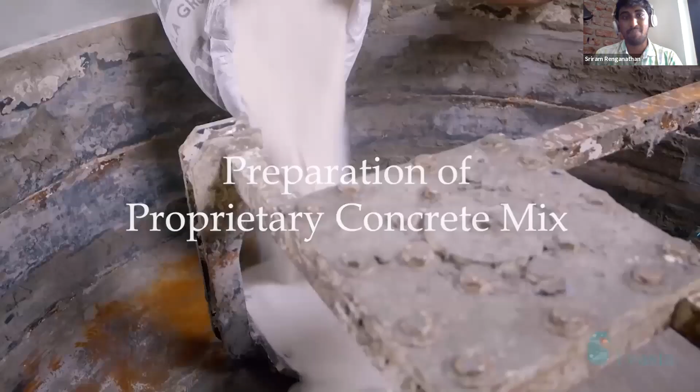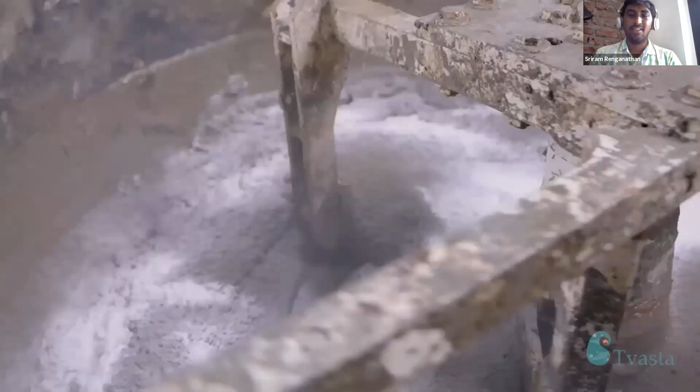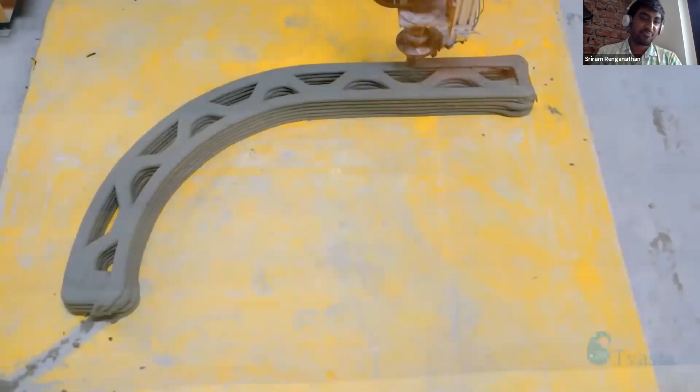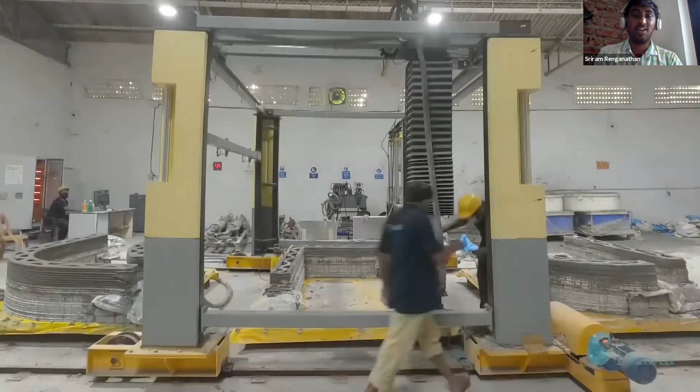I'll start my presentation with the making of the 3D printed house that has been in the headlines in the country for the past few months. This is the first 3D printed house that was made and installed inside IIT Madras. One big fact about the house was that it was made amidst the pandemic and the storm in Chennai - thanks to that, because without it, it wouldn't have been much of a topic of interest. Going back to it, what you're going to see is the making of each stage of the 3D printed house. This is the technology that we have developed. One interesting fact is that the entire technology stack is a made in India initiative - we made the entire hardware, software, and the materials. We researched and developed the materials, and then we also 3D printed the house. We are proud to say that we are a made in India startup who have completely revolutionized the construction field using 3D printing. What you're seeing is a 3D printer inside the factory. If you are in Chennai, please feel free to visit our factory. Per day it prints around 2 tons of concrete. I just wanted to start the presentation with this video.

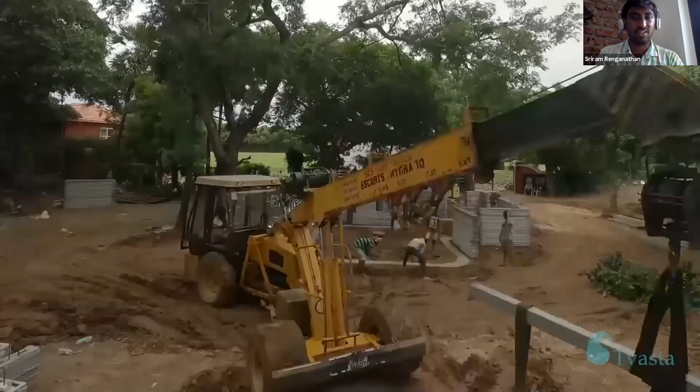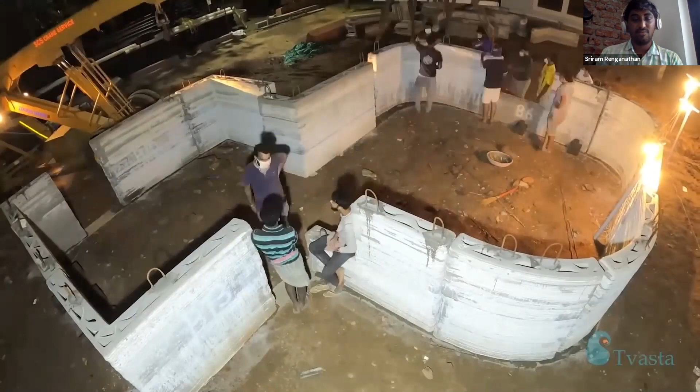The next stage you're seeing is the assembly of the prefabricated modules. The step is: we 3D print the modules in the factory, we take the modules to the site, then we assemble it, finish it, and deliver it to the customer. What you're seeing is India's first 3D printed house. In a few places, the 3D printed finish was left intentionally, because that is the raw and rustic finish that some people like. But I think going by majority, most of us like a very smooth finish in a house.

So that is why we made it as a combination of both. One good fact is that this was completed in a month—it took around 2 weeks for us to 3D print it and 2 weeks to assemble it. So we are coming up with more advancements to 3D print the entire house in less than 2 weeks.

What you're saying is beautiful architectural elements that 3D printing can make use of. This has been installed specifically outside the IIT Madras gate. If you ever come to Chennai, please feel free to visit it.

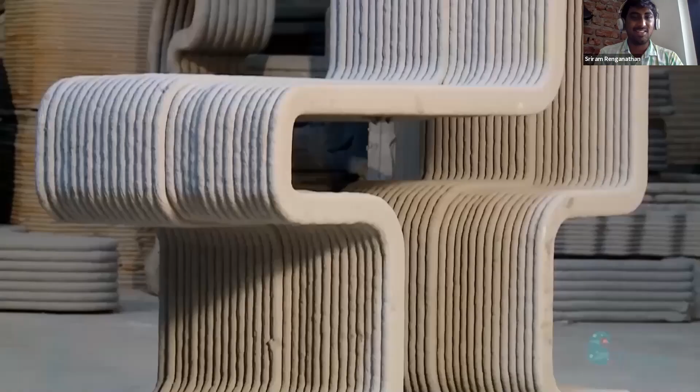And these are some customizable chairs that we have done, like pretty much some brand logos, customizable chairs using 3D printing. So the idea is that we make use of the customization of 3D printing, and then we deliver the best product to the customer.

And I also want to take a moment to mention that we have been mentioned by our Honorable Prime Minister in Mann Ki Baat, in the last edition.

Sriram, I'm afraid the audio is not coming. Oh, is it? No. Okay.

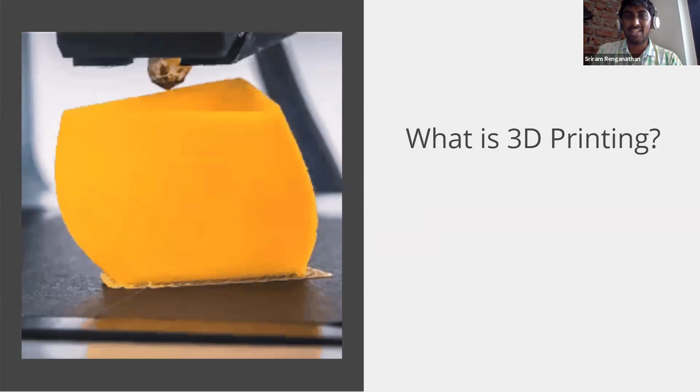At this point of time, there are 15 to 16 technologies in 3D printing, and it can be applied across different materials—plastics being one of them. Ceramics, composites, concrete, biomaterials, anything can be 3D printed, and that is a very interesting thing. It keeps inspiring us to explore different avenues of 3D printing. Any material can be 3D printed, and that is where our search is towards.

So sticking relevant to the topic, there are 4 critical aspects in concrete 3D printing. The first is the machine. Broadly, there are 2 types of machines: one is a gantry, and second is a robotic arm. Gantry has 3 axes X, Y, Z, and robotic arm has 6 or 7 axes.

At Tvasta, initially we started building gantry systems. We started out with a technology called offsite 3D printing, which means the machine will be placed in the factory, and as shown in the video, the models will be printed there.

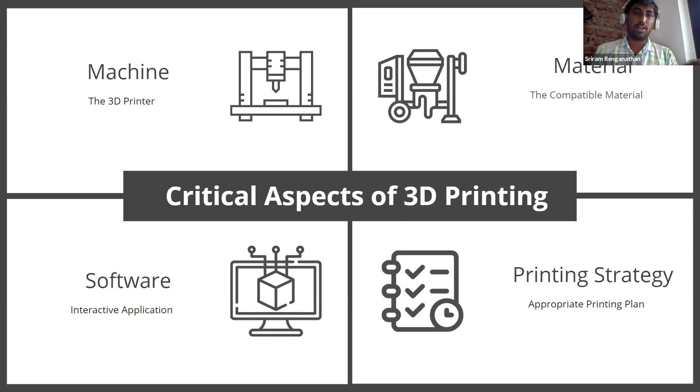Transported to the site, and then assembled. We are also working on a concept called on-site 3D printing, wherein the machine itself, in a modular way, can be transported to the site and the entire printing process can be carried out. Apart from that, we are also working on robotic arm printing, which gives different options of customizable designs or overhangs. So that is about the machine.

And material, as I told you, the concrete, we have engineered it in such a way that it is 3D printable. One big challenge is that it has to bear its own self weight. 3D printing is nothing but a layer by layer deposition of the entire design, so when each layer deposits, the concrete has to bear its own weight. That is the challenge. We have developed the material in such a way that it bears its own weight.

And software, as I told, to control the end properties and also give a user-friendly interface when interacting with the machine. The software we have currently developed estimates or optimizes the design. For instance, it tells you for a particular design how much material is needed, what is the printing strategy, what is the layer height, what is the size. It gives you every other information.

One interesting thing is that we are also trying to integrate direct BIM models into our software, so that construction files can be directly uploaded to our software and it can start printing. The last thing is the printing strategy, which we have already mastered over a period of 4 years.

Some applications demand a higher strength, and some applications simply do not require that strength. So at Tvasta, we look at the end application and then design the printing strategy. It can be done with steel reinforcements, or it can be done without. We customize the mix design accordingly, and then customize the printing strategies according to each and every application.

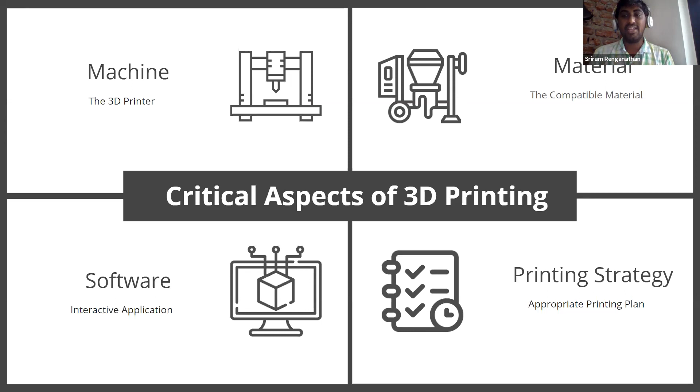The idea behind why we started working on such a path-breaking technology is to automate the construction process. As you all know, India being a growing country, we face a lot of challenges with respect to labor, or to be very precise, skilled labor. A lot of projects have been delayed and a lot of timelines postponed due to the lack of skilled labor.

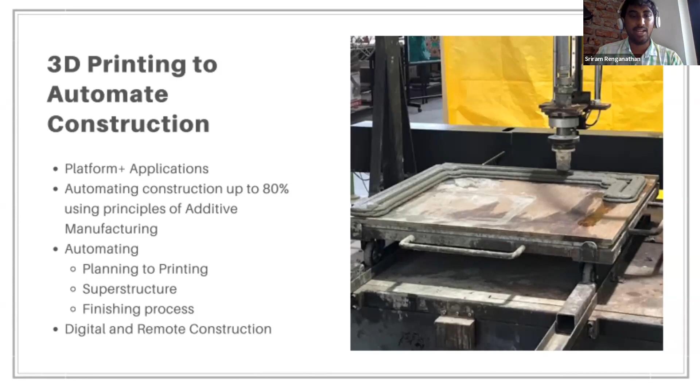One important thing is automating the entire process, which is monotonous in nature. The idea is not to cut the labor, but to automate the process and make people skilled or trained to operate the rest of the process.

If you look at it, we work on different applications, housing being one of our primary applications. We work on both premium and affordable housing. Tvasta is closely working with the Ministry of Housing and Urban Affairs to come up with affordable housing under the Housing for All scheme in 2022. As part of that, we are trying to see if we can actually bring this concept to slums and other remote areas and start implementing it.

One good thing is that instead of straight structures, we can bring in curved walls, curved elements, and add customization to the straight structures. Apart from that, small structures can be used anywhere - it can be toilets, cabins. We recently also built COVID isolation wards for the frontline workers in order to honor them. So the applications may be anything.

We also deal with miscellaneous architectural elements - it can be outdoor furniture which can be customizable, it can be facades, it can be any brand logos, and customizable walls. So we work on different applications.

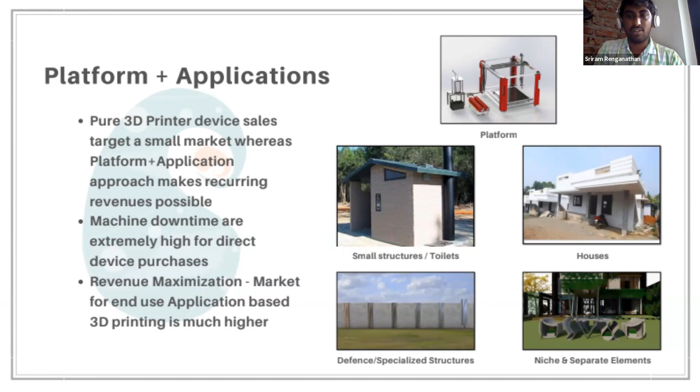This is a doffing unit, which means it's a COVID isolation ward. It is a 120 square feet structure, wherein frontline workers such as doctors or nurses can dispose of their PPE kits, and use the room to change or refresh. This has been done across 3 hospitals in Tamil Nadu, and was recently inaugurated by the Tamil Nadu Health Minister, Mr. M. Subramanian.

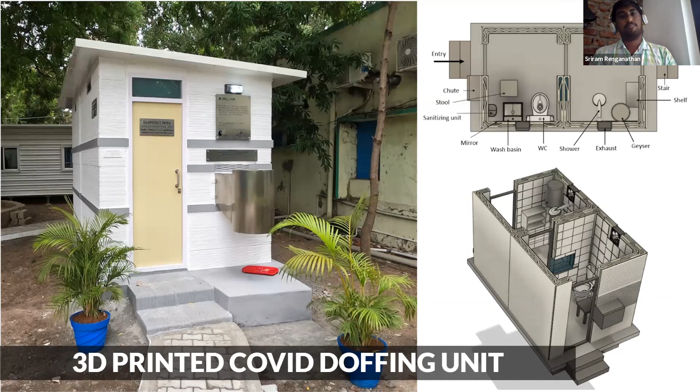The process flow for concrete: the first step is the design. Once you have a design of how the building will look, you input it into the software. Our software especially uses STL files as input, but we are also developing the capability to input BIM models directly. What it does essentially is slice the file into G-codes and then feed it to the machine, because like a CNC machine, a 3D printer also understands G-codes better. So it slices the file and communicates the G-codes to the machine.

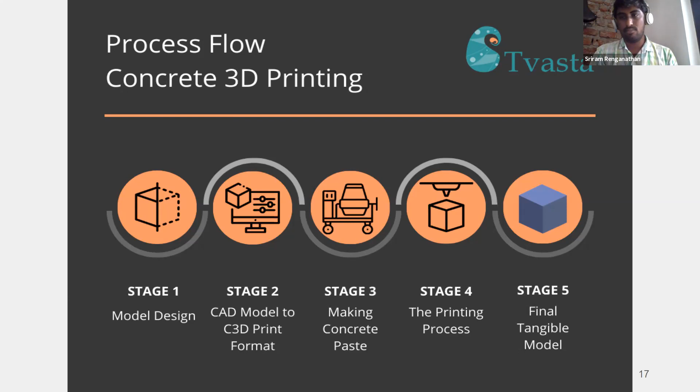Meanwhile, we make the concrete paste, which consists of cement, sand, and some other additives that make it suitable for 3D printing. Once both are given to the machine, it starts printing layer by layer, and the final physical model is obtained. For offsite work, we transport the modules to the site, assemble, plaster, and finish. But onsite, it starts printing all together, and then we just plaster it and the project is done. What you're seeing is our factory, which is in Chennai.

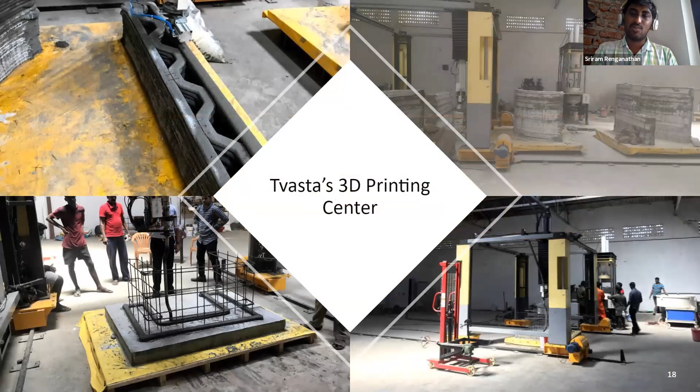It's a quite huge machine, with dimensions of around 3 meters by 4.5 meters by 1.5 meters. We are even building a bigger machine, in the range of 8 meters by 10 meters by 5 meters, for both on-site and off-site use. We do have quite interesting projects lined up using our machines.

This is a quick render of the 3D printed house. This 3D printed house was done using offsite concrete printing technology, in collaboration with Habitat for Humanity and IIT Madras.

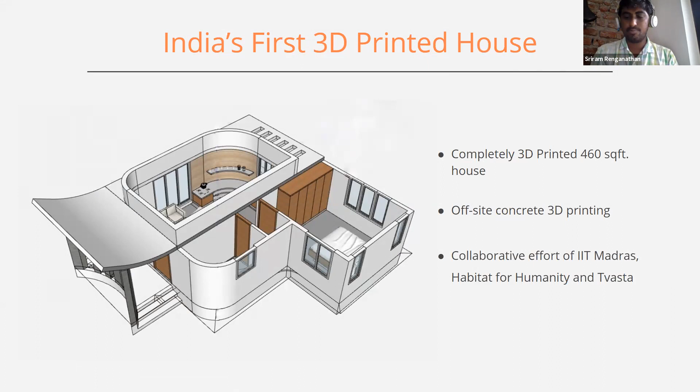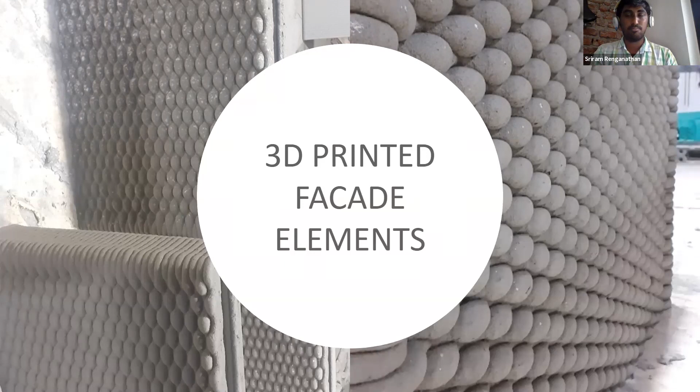If you look at what 3D printing is solving in a bigger picture, the world needs a solution which is affordable, sustainable, and speedy. Affordable means cost effective, and sustainable because there's a lot of carbon footprint being used currently, which directly contributes to global warming effects. In order to counter that, we need to move towards a green, sustainable solution—something many activists and enthusiasts have been enforcing.

And speedy, as such—time is money, and we've all heard stories where a dream house takes 8 to 10 months, or even years, to complete. This technology mainly aims at being affordable, sustainable, and speedy. We are already there on speed: a project that used to take 6 months has been done in less than a month. On sustainability, yes, we are working with elements that will reduce the carbon footprint. And on affordability, we are working towards it—in the next 2 to 3 years, we'll be as competitive as conventional or any other technologies.

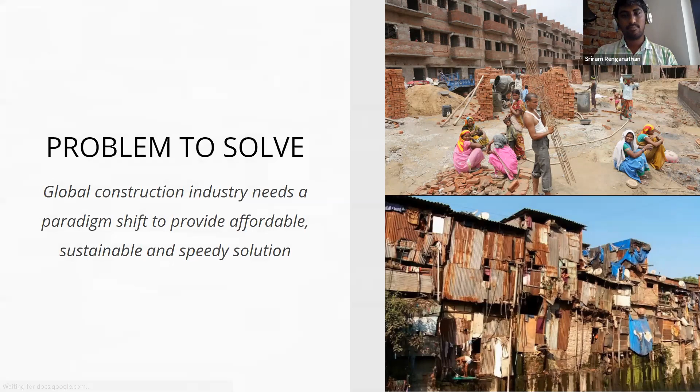Yeah, this is just to show that we have a great housing demand, and what we can cater to is not even less than 10%. So only if a conglomerate of technologies come together will we be able to capture the demand, or the demand versus supply gap will be very less.

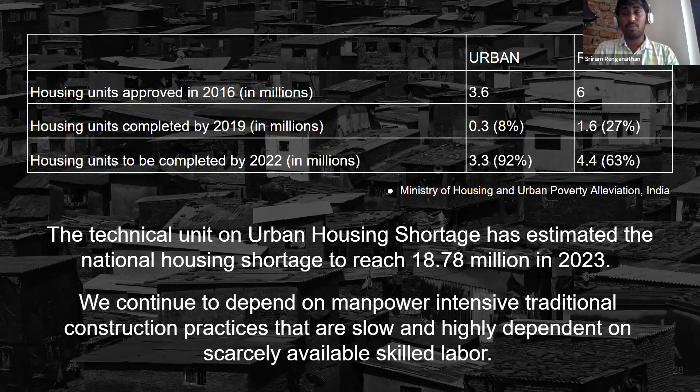In rural India, there is a desperate need for housing, because there is already a bit of different infrastructure, and due to that the mode of living or quality of living has declined. Providing houses to them will contribute to a lot of other factors, and that will also improve the condition of the nation.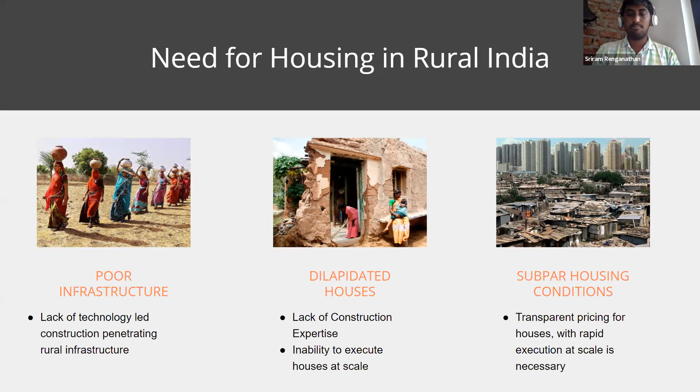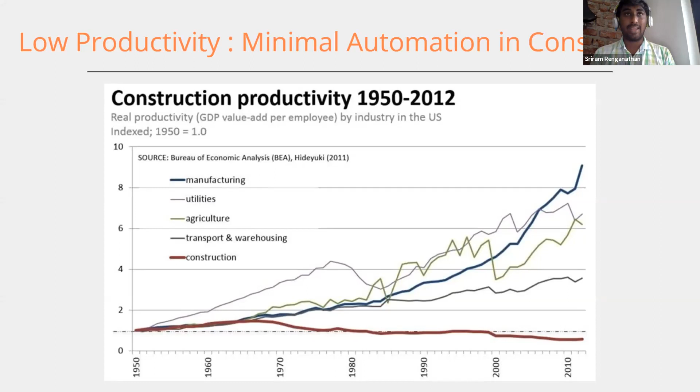In India, we have a massive housing shortage. So I think 3D printing as a solution will increase the productivity, and it will start working on the housing demands and reduce the wastage. As you all know, it exactly deposits the material that is required, and it also has hollow walls with an infill pattern, which brings a lot of other benefits like better acoustic properties and insulation properties. So it adds a lot of value, and 3D printing obviously increases the productivity.

And yeah, so finally the cost - as you all know, if you reduce the labor and reduce the material wastage, it is going to bring about cost savings.

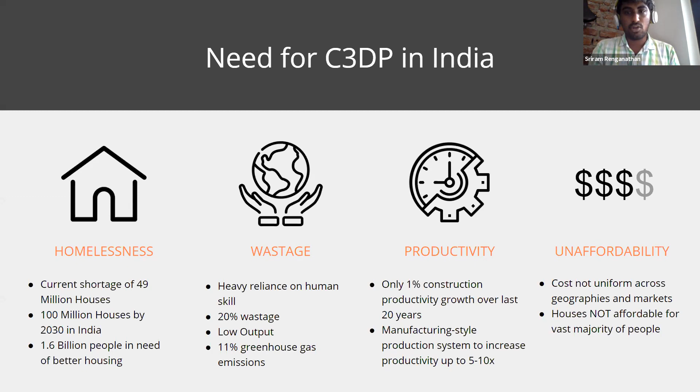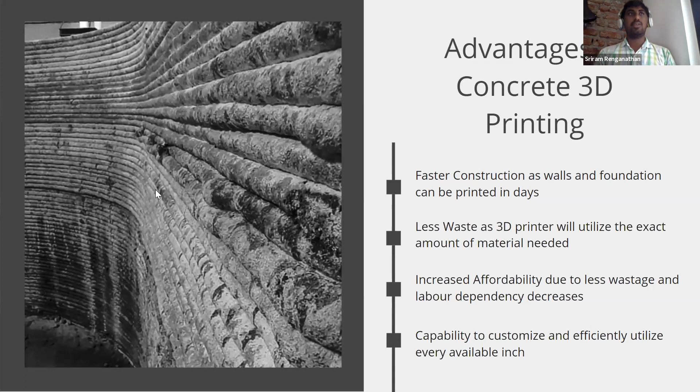So if you look at the advantages of this technology in a nutshell, the first thing I'd say is the lead time. It completely automates the walls, which constitute most of the area, so easily it can automate up to 80%. You're talking literally about days, and the foundation can be done in parallel while doing the walls. The roof can also be done easily, so you're literally reducing the lead time of the entire process.

The second thing is that you're reducing the wastage, which also brings about cost savings. Due to reduced labor and reduced wastage, we are enabling the cost savings.

The third thing is the design flexibility. As you all know, 3D printing can bring in customization, so any kind of structure can be developed using 3D printing. You don't have the constraint of thinking in matchboxes or straight squares or rectangles - you can go crazy in design and execute any kind of building.

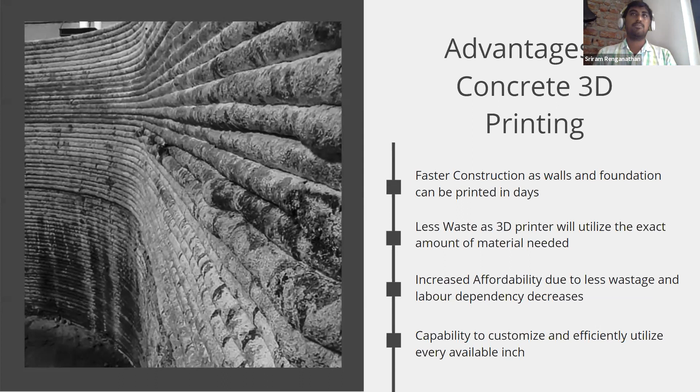And since it has hollow walls, you can integrate the mechanical, electrical, and plumbing wiring while printing, which increases the productivity. So in that way, once the building is done, you can move towards something like plug and play houses - you can directly start living there once it's been done. These are the main reasons why you should go for 3D printing.

One thing is that our next goal, or the future, is the on-site 3D printer, wherein you can just take the printers and modules, assemble them for a day or two, and then directly start printing bigger structures. I think you would have seen tower cranes anywhere - probably our vision is that everywhere there is an on-site printer which starts doing buildings in every part of the city or every nook and corner of the country. So that is where we want 3D printing to be.

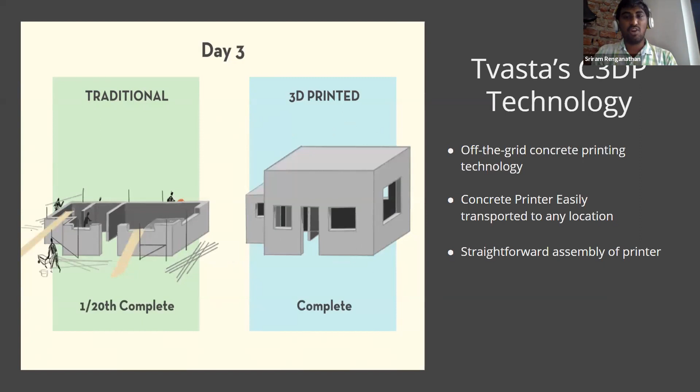So Tvasta has been putting a lot of effort with respect to building this entire ecosystem. If you look at the technology, we have done materials research with IIT Madras, and we are also working with approving bodies like government institutes on approvals or regulatory approvals for the entire system. We have developed in-house capabilities for developing the machine, material, and software.

On the technology front, we have spent 4 years mastering the entire 3D printing technology. We have almost around 1,000 test runs, and we do hold some unique patents with respect to a few parts of the technology.

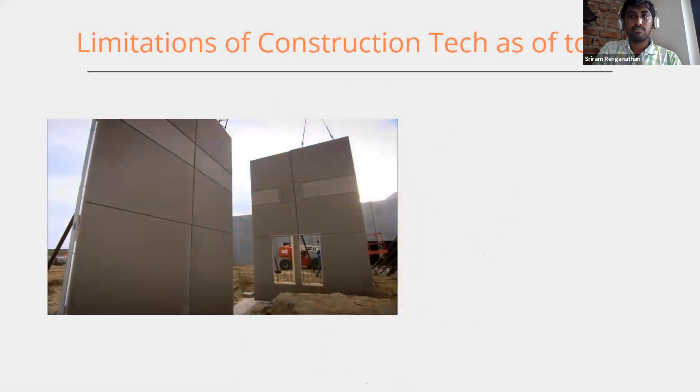As much as it has advantages, we have to be honest that it has some challenges which need to be worked on. The initial cost of this technology is high because of some challenges with respect to supply chain and a few other constraints. If that can be worked out, in a matter of 2 to 3 years, it can be as competitive as conventional technology.

Awareness is again a big point. It takes a lot of time for people to understand what it is that we are doing, what we are trying to automate, and there's also a fear that it might even take away the jobs of laborers. It certainly is not going to. So the right kind of awareness that needs to be there is also a factor or a challenge, but that rests completely in the hands of the ecosystem, in how we put the technology to them.

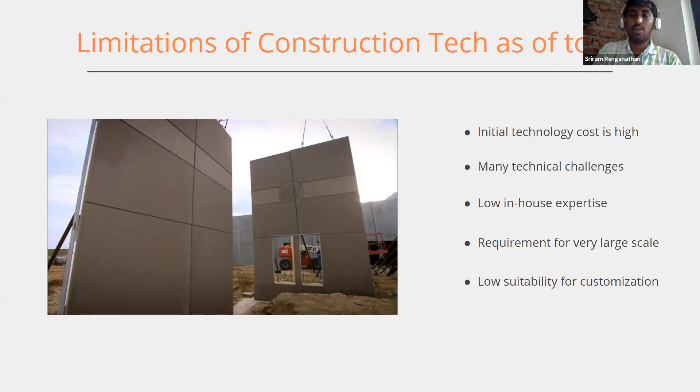As for expertise, I would say people should be skilled in operating the machine. Tvasta has a lot of plans in setting up training courses, and we will definitely offer extensive training once the machine is there. We do have a lot of plans with respect to training people on how to handle the machine.

We have been incubated by the Ministry of Housing and Urban Affairs, a technology accelerator called ASHA, which focuses on the global housing technology challenge. We are an IIT Madras alumni-based startup, and we also have been closely working with IIM Ahmedabad, CSA, CRC.

We still haven't stopped, and we are still researching a lot of areas where we can push the technology forward, so we are working on a lot of exciting things. We have a team of close to 20 to 25 people, mostly mechanical engineers, because they design the entire technology, the machine, and the mechanisms. That has been the best part if you look at our technology.

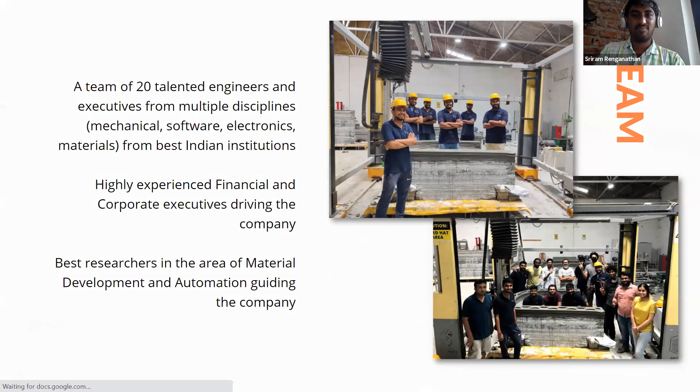That's about it. I'll be happy to take up any kind of questions in the next couple of minutes.

Hello. Yeah, am I audible? I didn't hear you. Sorry, there was an issue. Okay, can you repeat? Is it audible now? Yeah.

So the question was, are the 3D printed houses resilient to earthquakes? Yes. We have made it suitable to zone 3, the lowest earthquake resistant zone, but we are trying to get approvals. We are working with government organizations to get approvals so it can be used in zone 5, high earthquake resistance zones. So we are working towards it, but currently it is earthquake resistant.

Someone asked... sorry, I lost you. Am I the only one who's not getting it, or is there an issue there? Hello. Hello. Yeah, I can hear. Nitin, couldn't hear you. Hello, Moto. Hello, am I audible now?